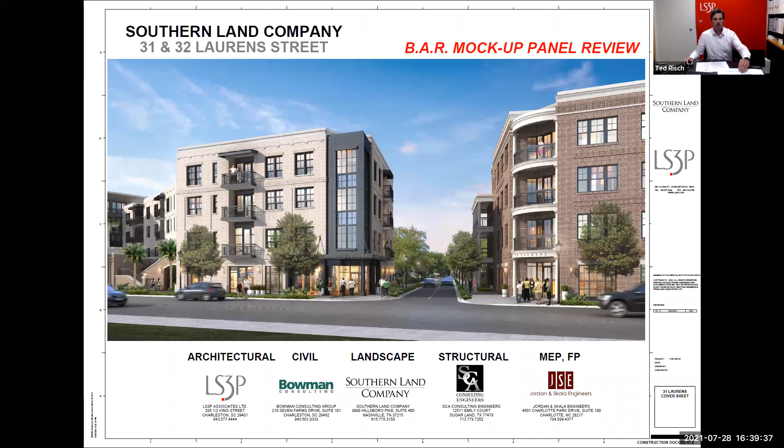There we go. So starting on the left is building A. We have our stucco wall panel on the far left of your screen, FRP cornice at the top, and carriage door with a projected box bay.

One note I had in the application was we deviated from the approved design of the concrete slab edge. Our original concept was to form that into the concrete using an edge form, and we weren't really satisfied with how that turned out. So we're proposing this alternative design, which we had previously in an earlier iteration of the project, using a pre-finished aluminum channel. We feel it's more successful and gives us the consistent look we're going for on the project.

Moving down toward the center, we have the cast stone surround that appears on building A, around this window. We abbreviated that from the original approved design as it felt a little chunky when we looked at it on the mock-up originally, so we brought that profile in. One item we noted yesterday on site was the vertical portion of the surround is actually going to have a window shoulder to sit on, to resolve a sloped mortar condition on the corner there.

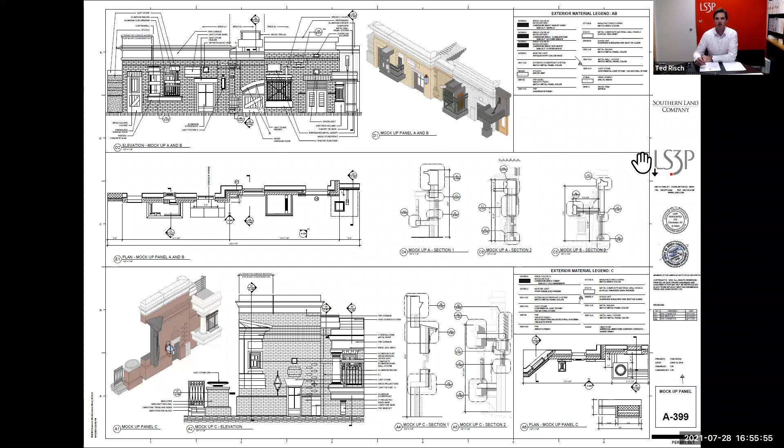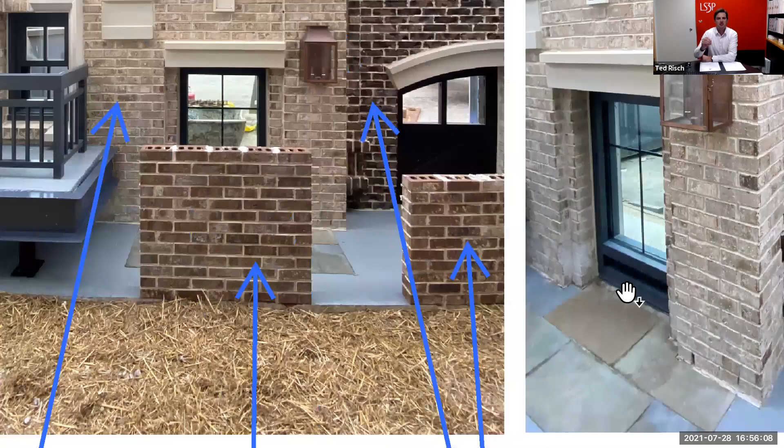That piece is a factory installed piece of the window that goes into the accessory groove, similar to the brick mold around the window. I just wanted to make that clear that it's a pretty traditional design as part of the window assembly. It's not a separate piece, so it's actually not there on the storefront, it's actually on the window. All those windows start at level 2. There might be one or two on the ground floor of building C, but you won't actually be able to see that from the street or from the right of way.

But it is in fact part of the pre-finished aluminum window assembly, and it's due to the fact that our windows are recessed so far into the wall that we needed that projected sill nose to span the gap between the window assembly and the brick sill. If we don't have that, we'll have to introduce a new material to span that gap, which will cause a little bit of discontinuity in the waterproofing, and just another element in the window assembly we don't really feel is necessary. So I just wanted to clarify that.

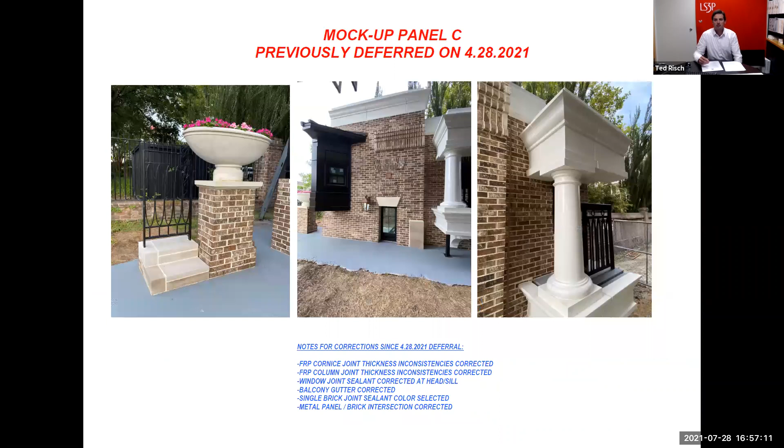And then obviously the long lead time items that we are focused on at this point for the project are brick and windows. So, thank you.

Okay, we will now move to board discussion and a vote, potentially a vote. What do my fellow board members have to say about this project?

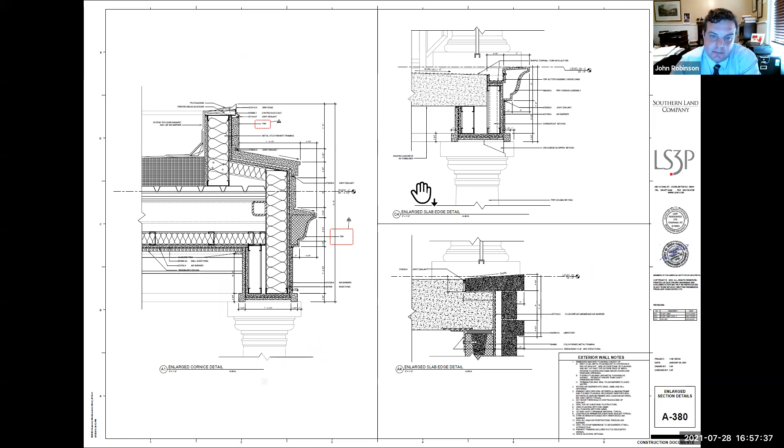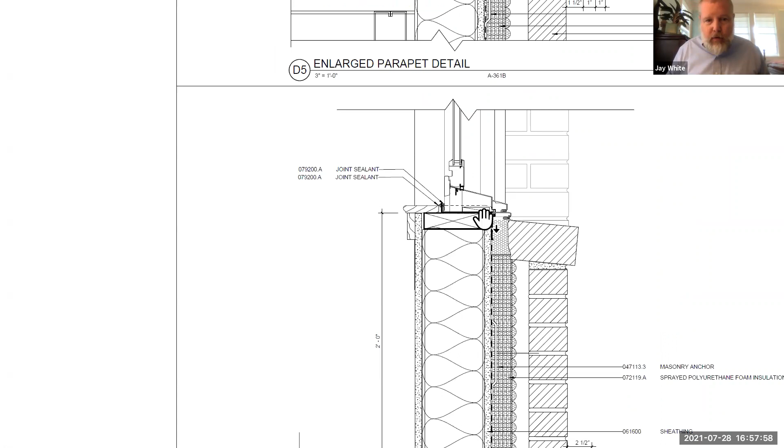I'll jump in very quickly on this. I don't really have a lot of comments. I know staff has spent a lot of time and has produced an exhaustive list, so I'll just go by method of exclusion here, the ones that I have concerns about. I actually think that those sill extensions on the windows are fine. That's a very typical thing, and I understand they're using tabbed windows here, so they're trying to close a gap, and I saw no fault with that. And then let's see what else.

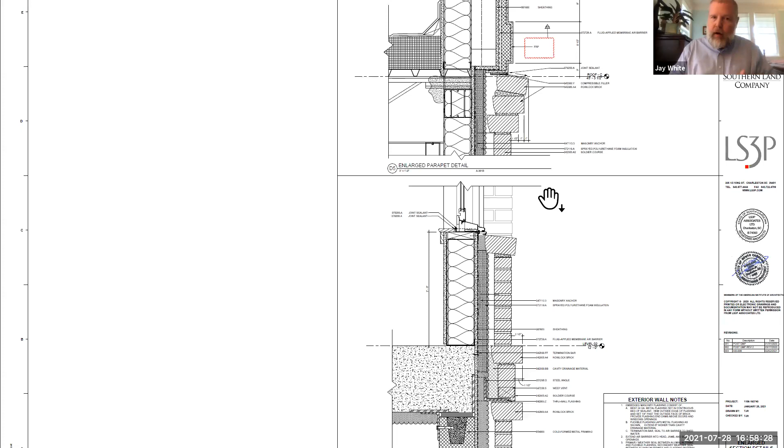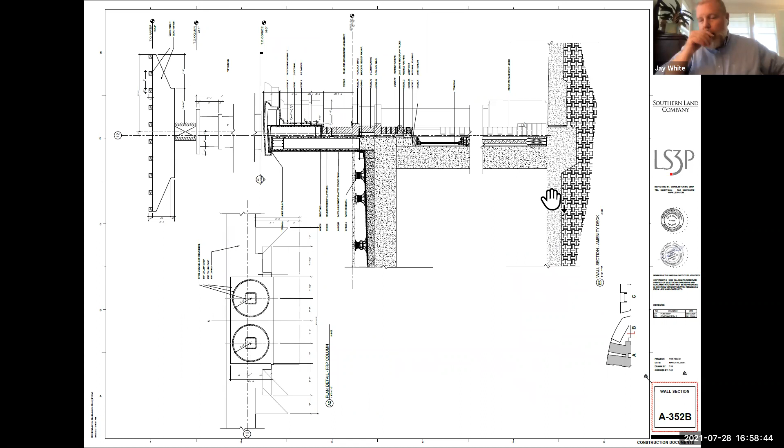The cast iron column—there was some discussion about that, and I'm going to jump between buildings here, so I'll just be frenetic. There was some discussion about making sure that the ceiling of the canopy or deck above was designed such that it reflects a beam or joist that bears upon that column. I think we all had a sense of what that meant, and I think it's just a revision to the ceiling design that would achieve that. It would be much improved, rather than just having that column sitting right above some bent, field-formed metal on the ceiling plane.

I would really caution the team to guard that precast or cast stone, because there were some dings that were repaired, and it was very obvious where that happened. Similarly, make sure the mortar joints between those units are really well tooled, because that was a little bit of a rough spot that we noticed in the field.

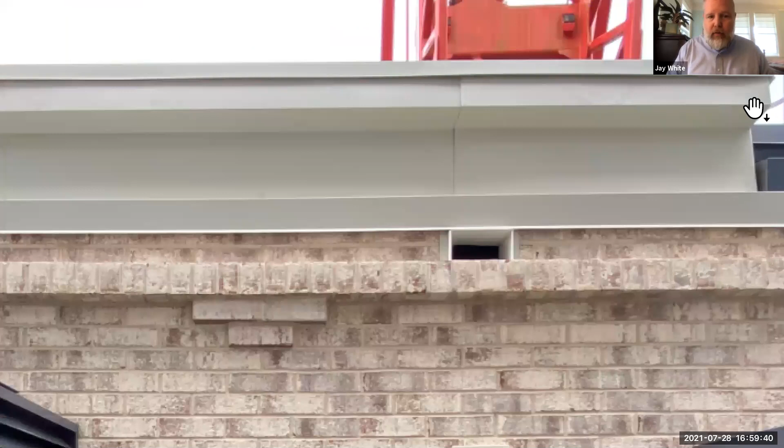A couple of things I'm a little concerned about: it seems like staff is recommending that we abandon the kick at the base of copings and other flashings. That's now what I would consider a traditional detail, to make sure you have a drip condition where you transfer from the metal to the facade material. That even shows up in 19th century or 18th century architecture, and I'm not opposed to it so long as it's clean and crisp. So I don't want to dissuade applicants from doing what is almost universally typical in architectural practice these days.

And similarly—I say similarly, and then I lose my train of thought. With through wall flashings, my studio's practice is to stop through wall flashings on brick masonry at the face of the joint.

That's debatable now, but I think if we're going to accommodate professional discretion and let people extend through wall flashings beyond the face of masonry, we really ought not to ask them to paint it, because that's a little tiny 3/8 of an inch strip of metal that occurs repeatedly throughout the facade. We're asking them to paint that and maintain that paint coating. I think it would be better if an architect, developer, or applicant wants to project their through wall flashings beyond the face of masonry, just ask them to use copper or stainless or something that will weather appropriately. Lord knows we don't want aluminum or galvanized, but asking them to paint it is not really going to work in the long term. And that's the sum of my comments.

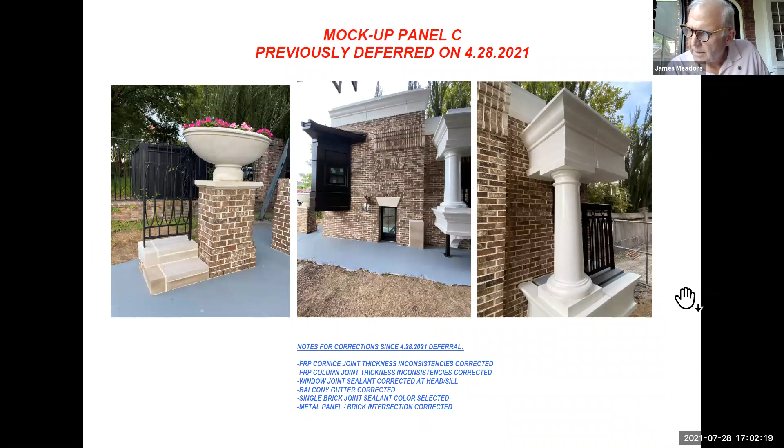As we discussed yesterday on site, the pop rivets should not be visible or exposed, even at an elevation where it's not visible from the street. Cut edges of roofing and flashing materials should not be exposed. Fasteners used for anchoring should be non-ferrous materials.

The sill on the mahogany window, I agree. I felt that it just extended a little too far. Thanks for cutting that back.

It was unclear to me, even though I got down underneath and looked at it, how the bottom of some of the balconies were going to come together, and the small outlet where water would be draining from the built-in gutters and the porches. I was unsure of where that water was going when it came out of that scupper.

I agree with Jay. The sill extensions on those windows actually come with a groove for that sill extension to be applied. And the way this wall is put together, I think that is better than adding an additional material to waterproof the window.

Also, on the strip of through wall flashing, if it is extended through the joint and then turned down, it must be a non-ferrous material. I agree that painting that probably would not be successful long term, because the edge may be cut unless it's coated after it's been bent. So some type of non-ferrous material.

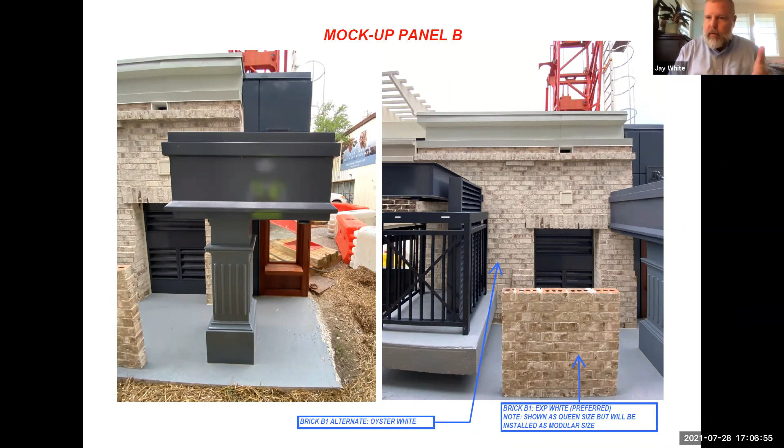Okay, further board comments or questions? One thing I forgot, and I think Leon was alluding to this: there's a condition where we have the aluminum plate on the face of the concrete, cast in place concrete balcony. We're talking about covering that gap somehow, maybe with a plate or some other thing. Also, all of that metal is so finely executed, it really looks great. However, on the underside, you see exposed welds that are not ground, and they're perfectly done, like stacked dimes as they say. But considering the fine execution of the overall piece, I think those welds should be ground as well, just so it looks monolithic. No exposed welds.

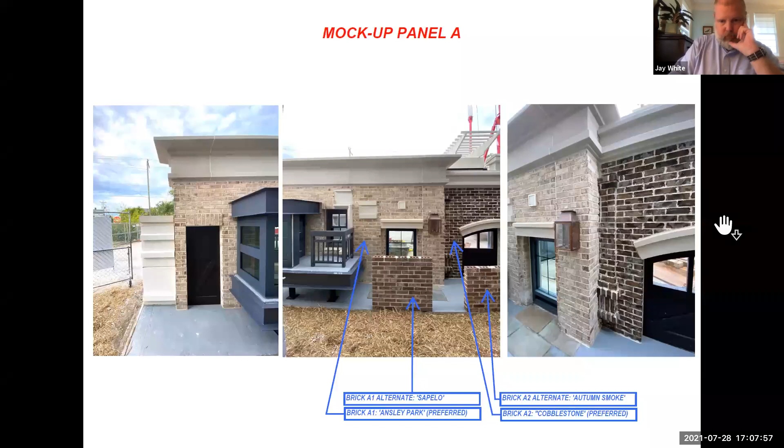So if there aren't any other board comments, I might introduce a motion with the preamble. I think this is a very well executed mock-up at this stage. The overall execution is very, very finely done, and one of the better versions we've seen. So I'd like to introduce a motion for approval of each of the mock-ups with board and staff comments.

Okay, and I second that, Mr. Chairman. Thank you. Board and staff comments. The motion is for approval of the mock-up with board and staff comments.

I'll ask this as a procedural issue to either Lawrence and or Tory. Do we need to vote on them separately, or can we vote on them as a block since we appear to be of a mind? I think since the motion is the same for all three, you can vote as a block. I did too. I just wanted to know if anyone, especially staff, had any different opinion.

So, Mr. White, your motion, as I understand it, is approval of each of the three mock-ups with board and staff comments. Have I read that correctly? That's correct. And I have a second from, was it Mr. Scott? Mr. Meadors. Mr. Meadors. All right, I'll proceed to call the roll.

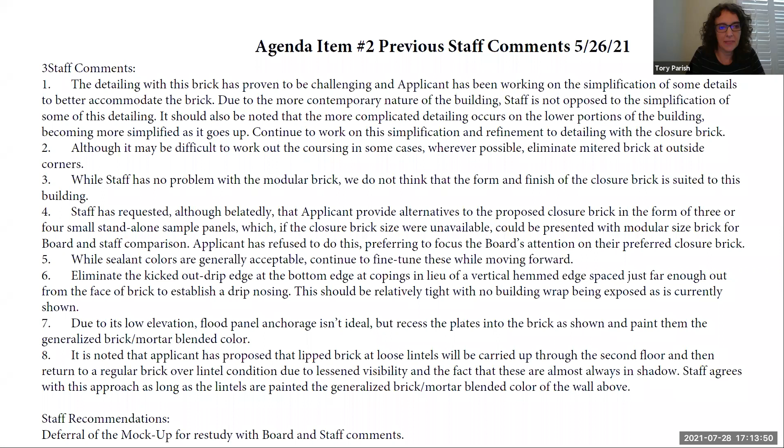Board comments from May 26 were: there are gaps at the top of mullion to lintel and bottom of mullion to metal piece. There are holes in the brick showing.

Would defer for restudy, agree with staff recommendations. Closure brick looks cartoonish, agree with staff and board comments. Agree with staff. The motion was deferral for restudy with board and staff comments.

Okay, we're going to show you some previous mock-up photographs. Whoops, we're zooming.

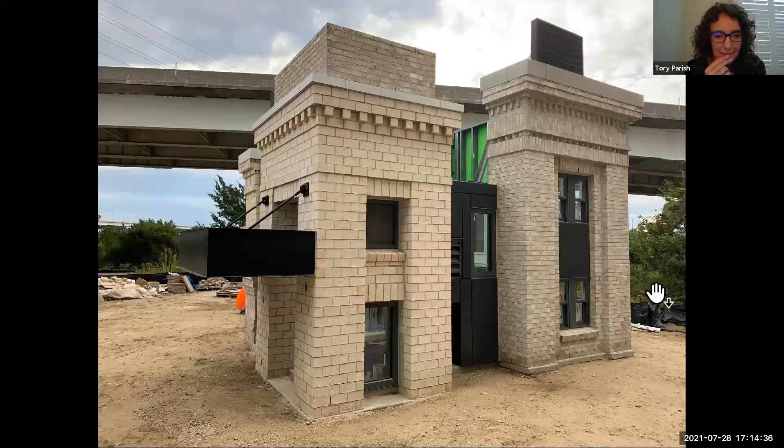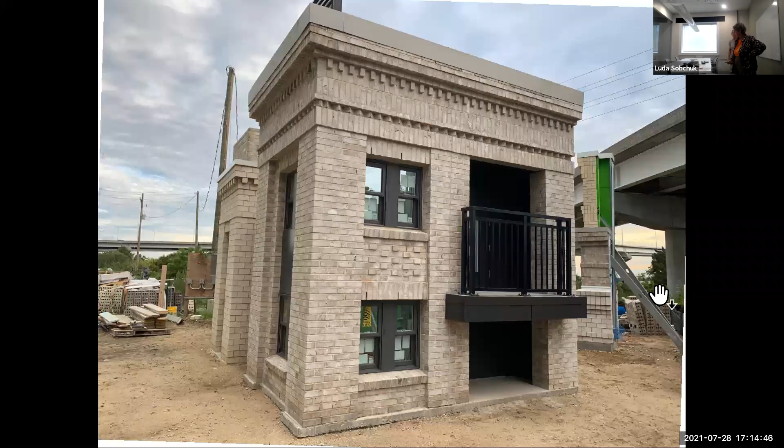And then we have some photos from the supplemental mock-up.

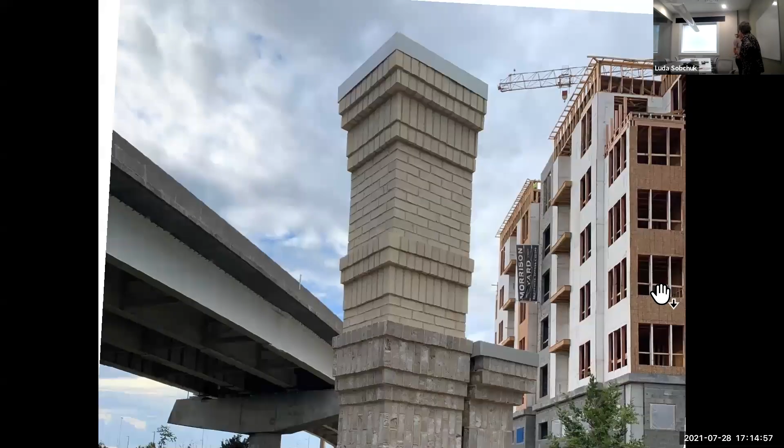We'll try. Thank you.

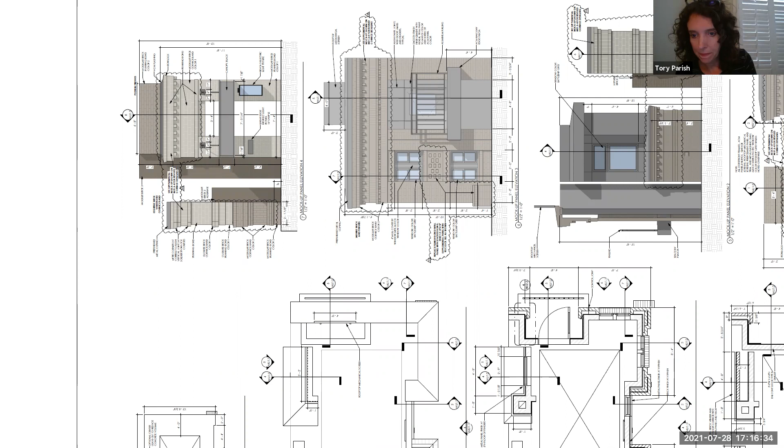I'll start us off, Mr. Chairman. Good afternoon everyone, thank you for your time. As Ms. Parish was just telling you, it was the end of May when we had our last discussion. The panel that you see on the screen right now was the first panel that we presented to you.

We've continued to work closely with staff, Ms. Parish and Mr. Courtney, to go through those comments. And I appreciate her reading through those comments again, because they've been very meaningful to us, just like it has been all the way through the entire BAR process. And we take them seriously.

And so this is where we really hatched the idea of leaving the first panel intact, so we would have it for comparison and contrast. And we developed the idea of creating a separate panel, which could be the separate second sheet. If you could go to that, please.

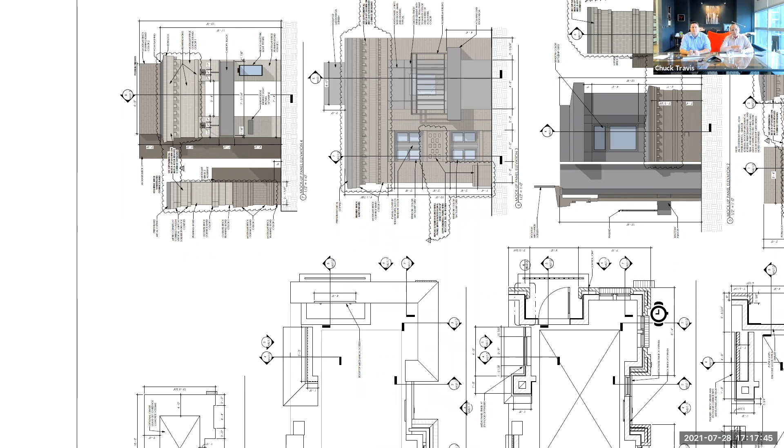And the idea behind having this second panel, we also met, we collected brick samples and actually drove to meet with Ms. Parish and Mr. Courtney in front of their office building and show various brick options to them, discuss it. We also talked about the construction of this panel and how one of the comments was to deal with simplifying the details so that it's more complementary to the more modern aesthetic of the building that we've been using all along, and we felt like the detailing is more appropriate. So we talked through all of those details.

It's been a conversation that's been ongoing, and we certainly appreciate all of their help and assistance, and obviously being very willing to work with us to get the panel that you guys visited yesterday and had the opportunity of meeting Ms. Curlin on site to discuss. We do feel like the process has been extremely helpful to us.

And what I would like to do, since you had the opportunity to meet with Maria on site yesterday, I'm going to turn it over to her. We're going to talk about the positive things that we feel came out of that conversation. We also want to address some of the things that you had concerns on that we put additional thought into, and want to give you those responses as well.

So Maria. Thank you, Chuck, very much. I apologize, my camera is not on, so I'm not sure if that's good or bad, but we'll just make it do. It's awful, it's terrible. I apologize, but you met me yesterday, so you know I'm real.

This is not a virtual person.

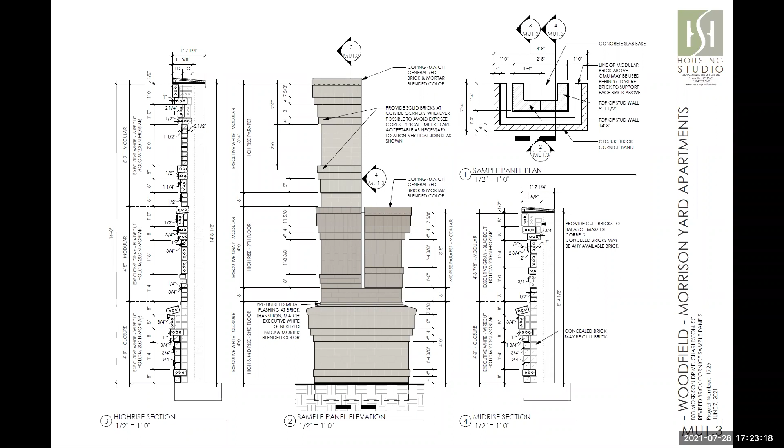Another item I really wanted to point out, which we reviewed yesterday, is that our flood panel anchorage was much better resolved now. Not only did we recess it into the brick, but we also painted the anchorage plates with a color closer to the more generalized brick mortar blended color, which is also the same color we used on painting our lintels.

Another comment was tied to our mullion coverage in between the windows, and the center mullion was revised. We're using a larger panel to actually provide better coverage and have a tighter edge that can be caulked, and it will not have any gaps as previously noted by the board members.

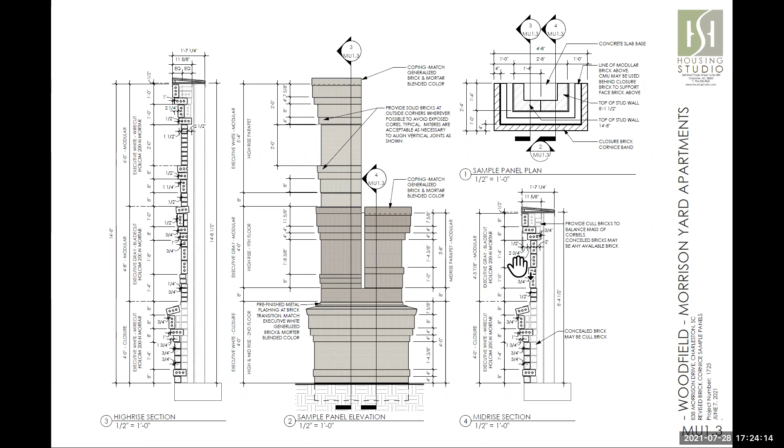I think overall, we presented a more simplified design with a different brick shape, if I can say, and size. We hope that you agree that it's a more successful design. I also want to use this opportunity to talk about some concerns that some of your team members had yesterday.

I think Mr. James had mentioned a concern about metal fasteners on our mock-up. I wanted to say that we designed the whole project with concealed fasteners to the greatest extent possible. But if there were some fasteners that by necessity had to be located at more exposed locations, like the one pointed out where the panel is under an angle under the window, where the connection was a little more visible than in any other typical location, we're going to try to have the attachments in a more inconspicuous location, and we're going to use color matching to make sure the attachments match the background so they're not visible.

I think Mr. J had a concern about the mitered corners. We did try our best to use mitered corners only where the corners are really needed and necessary, and in situations where we needed a pitch required in both directions for a horizontal surface to shed water. We were also trying to align with staff's comments asking us to align the vertical joints. Between all these different situations, we thought we did the best we could with the overall design.

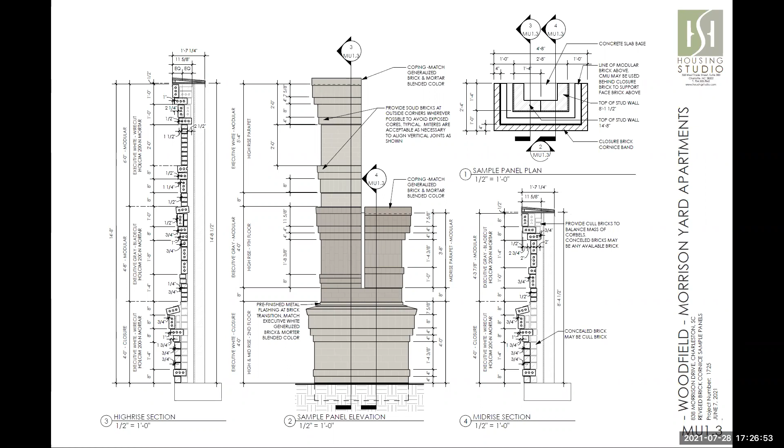Thank you, Maria. Anything else from the applicant to add? No, thank you, Maria, I think you summed it up really well. That was a very responsive summary to our conversations and issues raised yesterday.

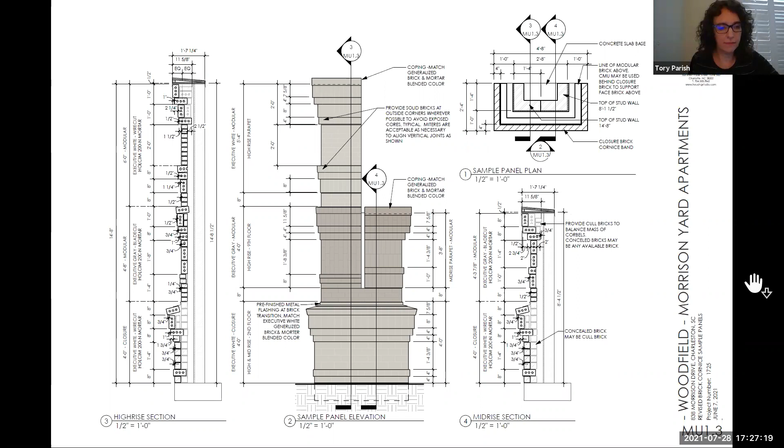Thank you. Ms. Parish, do we have any public comment on this project? Not. I did not think so. Okay, that being the case, we will move to city staff comments and recommendations.

Okay, city staff comments. Number one, see related notes on item 1 of this agenda for typical issues where applicable, and we can probably discuss those if needed. Number 2, this bears some explanation as follows.

A, staff had originally advocated against the closure brick. Applicant was very enthusiastic about closure brick, and staff subsequently agreed for applicant to show a portion for the two lower floors on the mock-up. B, initially applicant was a bit over enthusiastic and placed the same brick high on the high-rise section of the mock-up. Staff objected to this reversal of tectonics.

C, applicant was having issues with detailing and wished to simplify them. Staff advocated for the simplification, believing in part that this was anachronistic on a new contemporary style building, and simply muddled the language of the building, as well as some being too high on the building to effectively read. D, applicant has built a supplemental mock-up showing the simplified detailing, an alternative closure brick per staff's request, and colors proposed.

Number 3, staff prefers the blade cut brick, although wire cut might be used at the top of the high-rise section. The staff recommendation is approval with clear differentiation of what board and staff have approved, and staff to work with applicant on any unresolved issues. If staff and applicant cannot resolve issues, a stop work order will be placed on the project and the mock-up will be brought back before the board for resolution.

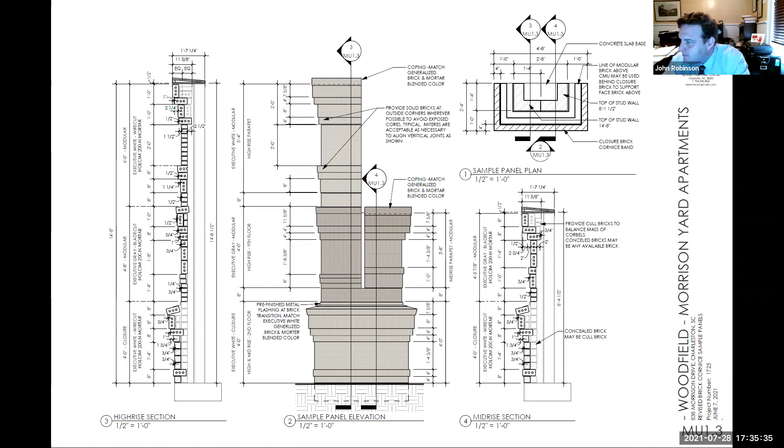Mr. Scott, how do you vote on this item? Yay in favor. Ms. Sobchak—we may have lost her to a mute again, so I'm going to scroll down to her image. Ms. Sobchak, how do you vote? Oh, that's a yay in favor. Mr. White? Yay in favor. Mr. Metters? Yay in favor. And myself, yay in favor. So the mock-up incorporating board and staff comments passes unanimously. Thank you all, thank you to the applicant. Thank you very much.

Ms. Parish, what do we have for agenda item 3 this evening? Okay, moving on to agenda item number 3. This is 578 Meeting Street. The request is for conceptual approval of a new mixed-use structure with parking, incorporating a small remnant historic structure. The project is not rated. It's in the East Side neighborhood, and the historic structure was constructed in 1929, and this is in the Historic Corridor District.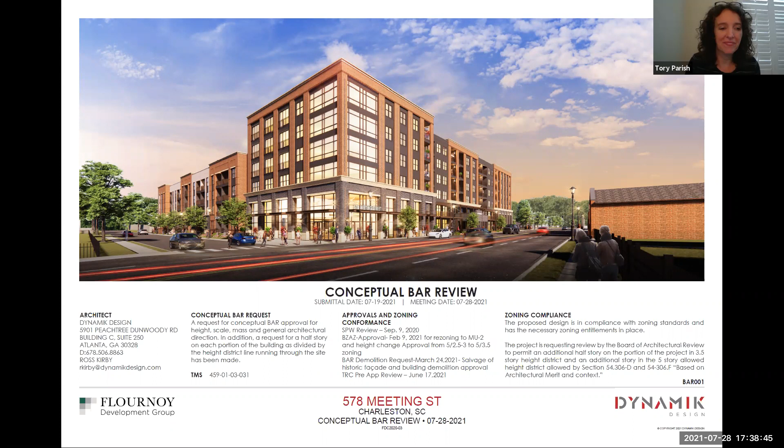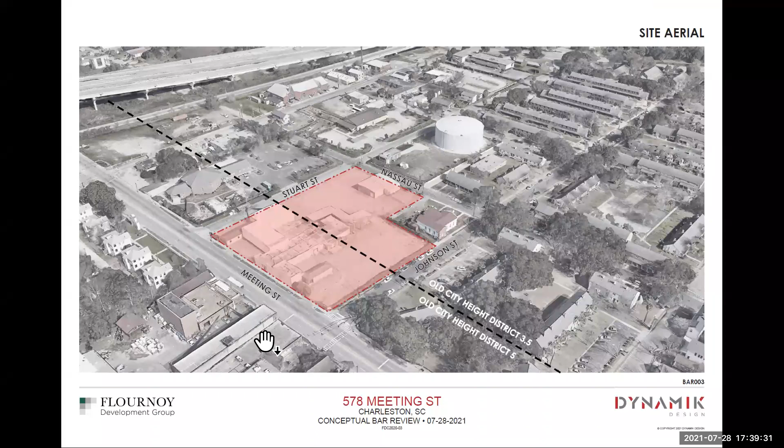There's a few items on context I want to touch on that are relevant to the project. As you said, you're all familiar with the site, you've driven by recently when we had the demolition request. Some of the key context I want to point out is that the majority of the projects in the surroundings are 2.5 story residential. There's a church directly to our southeast, the chapel there, and then one just to the north across Stuart Street. Across Nassau to the east is a very impressive water tower, water tank. And just to the west of us, across Meeting Street, is a recently completed 5.5 or 6 story multifamily project that's set back a little bit from the street and has similar retention of a partial historic structure on Meeting Street. So if you'll go to page 8, please.

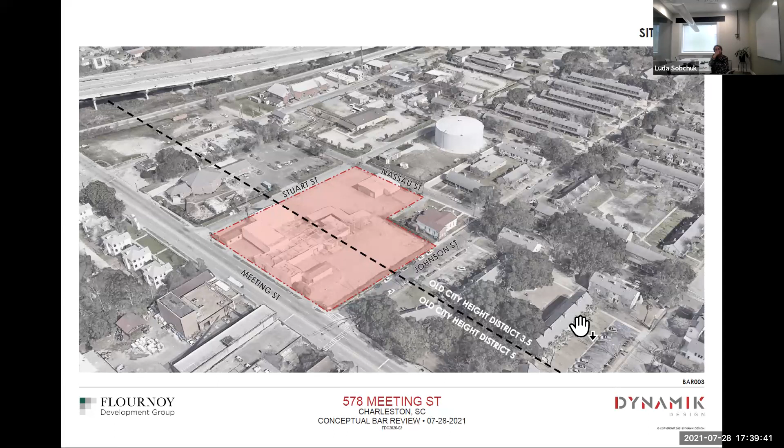We'll go past some of the historic context—these are all part of the previous demolition package. Some images here on the top left show existing context of the 2.5-story residential uses and the chapel that's on the southeast of our site, as you can see on the top right and bottom left of the page. On the bottom middle of the page, you see a portion of the existing Regis Mill industrial facility that we're maintaining a portion of.

If you'll go to page 9, please—the bottom left image, you can see closer to street level, the water tank that's to our east. We'll go back one page. I apologize for skipping around a little bit. I want to make sure we cover everything in a way that makes sense, but putting together a package that puts everything in order we can look at. So back one more page, please.

On the top left of the page, you'll see the church that's to the north of our site. On the bottom left of the page is the recently constructed multifamily project directly across Meeting Street from our site. And highlighted in that bottom middle image is the portion of the Regis Mill that we are preserving and incorporating into our project.

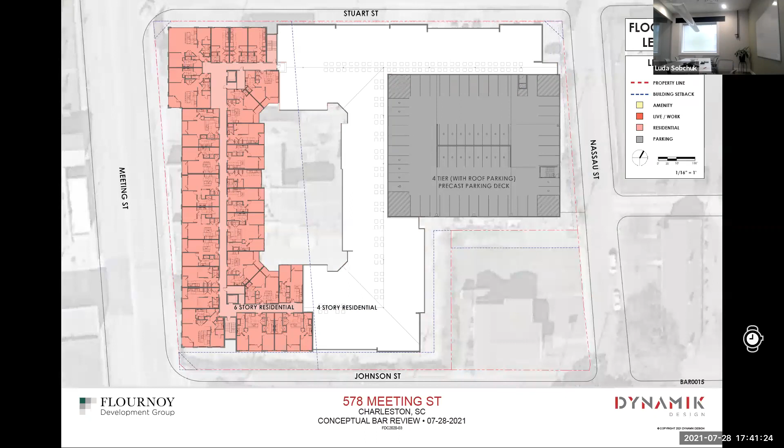So then if you'll go to page 15—one of the main goals of this project was to take what is essentially a completely paved, underutilized and unengaged industrial site and really try to convert it into an integral part of the broader community. We want to incorporate a mix of residential and some light commercial in the form of live-work units that really create an engaging public realm where right now there really isn't one.

You can see in the way we organize the building—I'm sure you've all reviewed this package before, or at least some of you are familiar with this, so I won't belabor the obvious—but we've oriented our parking deck and our services on the east side off Nassau, which faces the water tank and doesn't directly front on other residential or commercial properties.

So we felt that was an appropriate way to organize our service areas.

Along the western and southern portions of the site, we've really made an effort to pull our building back and contribute some additional space to the public realm beyond the 10-foot sidewalk that's required. It ranges in depth between 4 feet and 18 feet, in addition to the 10-foot sidewalk.

We're turning that space over and converting it into a number of different public use types. Our approach to dealing with the public realm of this project has 4 parts. We have an incorporation of light commercial live work units and amenity spaces along Meeting and Johnson Streets on the west and south sides of the site. We also have - and we're going to talk about how we're reintegrating the Regis Mill building into our design, rehabilitating and giving it a new life.

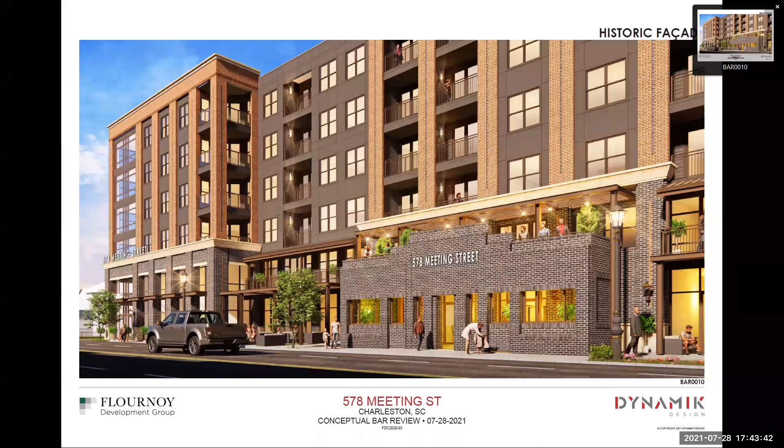The first thing I want to talk about is one of the things that's really driving how this project interacts at the street level - our integration of these live work units and amenity spaces on Meeting and Johnson Street. In this image, you can see an up-close rendering along Meeting Street of the existing Regis Mill facade in the foreground, and off to the left side of the image, the ground floor is our amenity space, our club room. What we've done is take the Meeting Street building, the portion we're maintaining, and reopen the window openings that were bricked up.

Because the existing structure behind it - the roof - is failing and not really able to be rehabilitated without being replaced, we tried to come up with an idea on how we can use this space without just gutting the facade and leaving it. So what we planned is live work units directly behind the Regis Mill facade, extending all the way up to where the building jumps out to the north there.

We create an outdoor terrace for the live portion, the residential portion, on the second floor of those units, so there's activity that's a little more secluded and private, but still happens above the existing facade. We've created trellises and canopy shading structures up there that relate to some of the other architecture on the building.

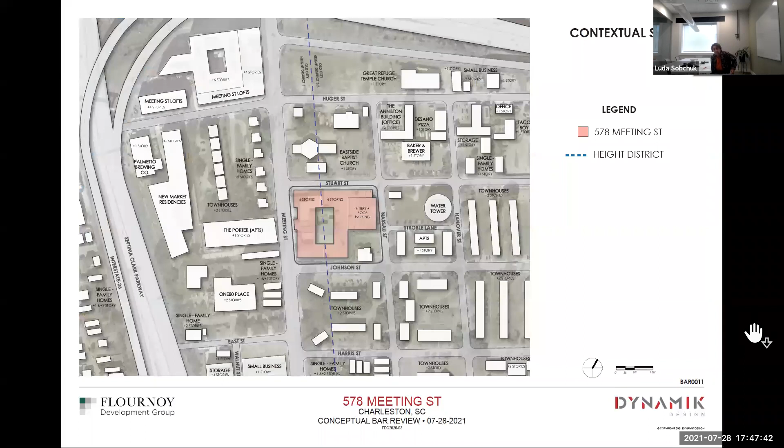Just to the north of that is the more semi-public spaces. That's where it's the deepest, about 18 feet or so, in addition to the 10-foot sidewalk. And then the size of the space tapers down just south of the Regis Mill facade.

And it's still a public space that is covered by shading elements that again serve as balconies for the living units above. Along the south side we have a little bit of a unique situation because there is an existing drainage easement that we cannot build any physical structures on, but that we can landscape and hardscape.

So we wanted to make the best use possible of that and create a lot of public outdoor space with additional landscaping and seating areas that we are going to continue to develop as we move through the project. They really present an open, almost a plaza of sorts with the width of the 10-foot sidewalk, about 25 feet in total depth along those live-work units.

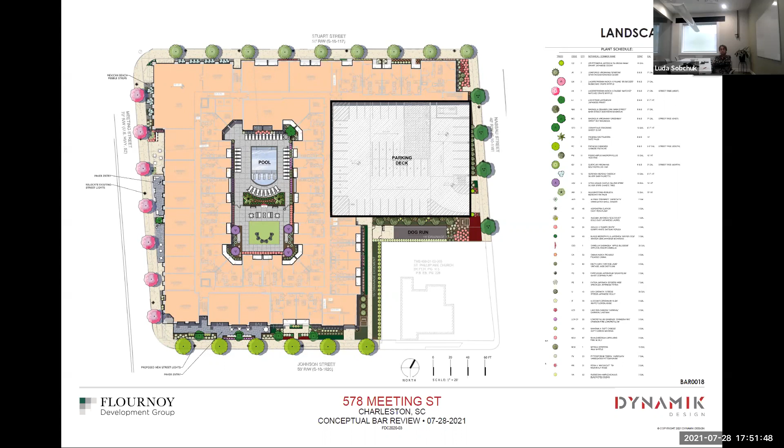And our justification for architectural merit, I want to run through a few items on. I'm sure you've looked through the bulk of our presentation, and we tried to go through and really take in the BAR's guiding principles and apply as many or all of them as we could to this building, and really try to work within those guidelines for developing the project to justify our architectural merit. So if you could please, we're going to skip a few pages ahead because I want to cover a few specific things - to page 31.

We put in diagrams and exhibits for each of the guiding principles and ways we've tried to incorporate those into the project. In this one, I want to talk about our extensive use of brick, natural stone, and glass to create what appears to be a single-story double-height base to the building, since our intent is to mitigate the appearance of this building as 6 stories. We've incorporated full-height glazing on the first 2 stories, with a cast stone trim piece above the second floor to create a base, then switched materials above to delineate the base from the 4 stories above, creating the visual appearance of a 4-story over 1 rather than a 5-over-1 building along this 6-story portion.

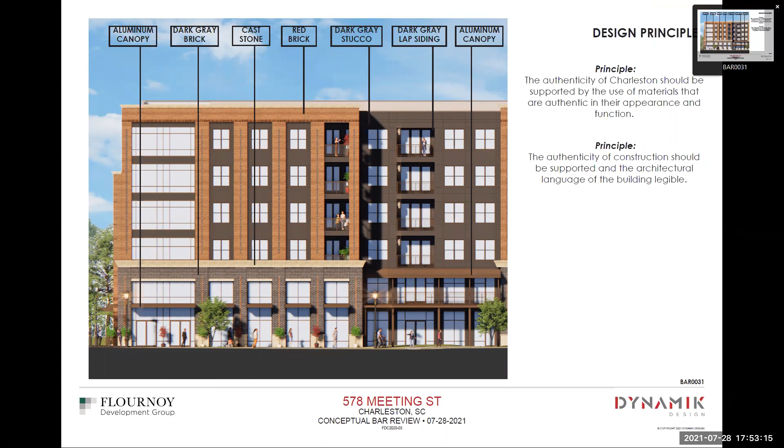What's really important to us is using authentic materials throughout, so we've stayed away from composite products and gone with natural ones—brick, stone, and stucco. The idea is we're working within that palette in prominent areas like the main corners and exterior facades, using them to break up the building massing, which, as you've noted, takes up the entire city block. It's important that it be visually distinguishable from one portion to the next and not feel like one massive block of a building.

One thing you'll note in this corner is the implementation of more vertical elements, carrying the pilasters all the way up through the top of the building—part of the design language incorporated throughout, whether in the 6-story or 4-story portion. Even elements like the glazing at this corner on the upper 4 floors may appear horizontal in isolation, but if you look at the entire composition of this corner, the way it's tied together from top to bottom creates a vertical element that draws your eye up and extends the verticality of the architecture.

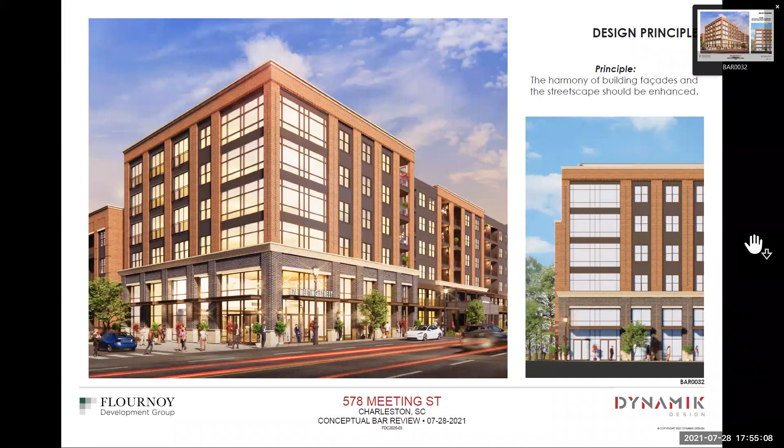You can see in this image, and on the next page, that we've made extensive use of glass on the ground floor for visual transparency. This diagram shows all the areas of the ground floor with live-work units where we've incorporated double-height, floor-to-ceiling glazing in both the ground floor commercial portion and the residential portion above. The only place without that double-height glazing is just north and south of the Regis Mill facade, bumped out on the Meeting Street side, so those areas don't compete with what's intended to be a focal point at the center of the project.

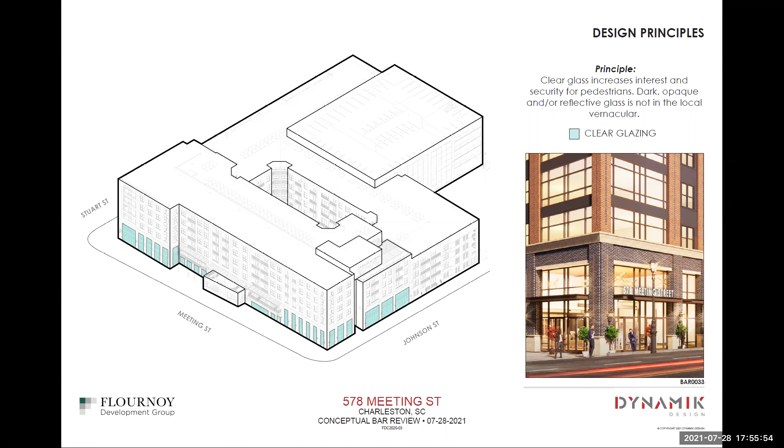As I mentioned, one key principle on south and west facing facades is the incorporation of shading elements. On the northwest corner, we have smaller canopies integrated into the storefront of the double-height club space. The double-glazed area along Meeting Street is the balcony and trellis at the level 2 elevation, and above that we have a pitched standing seam awning for additional shading and variation. At the center portion of the Regis Mill, we have another variation of the louvered open trellis used at the Sky Lounge, where we're stepping down the building to create an outdoor terrace with a full open louvered sun shading element.

On the south side, because we're restricted in what can project over our drainage easement, we've chosen to recess the ground floor storefront back into the building. This serves two purposes: it creates shading at those entrances, one of our design principles, and it creates a minor but important expansion of the public sidewalk—recesses like that draw you in visually without needing excessive signage saying 'enter here.' It naturally draws people into the places in the building where we want them to go.

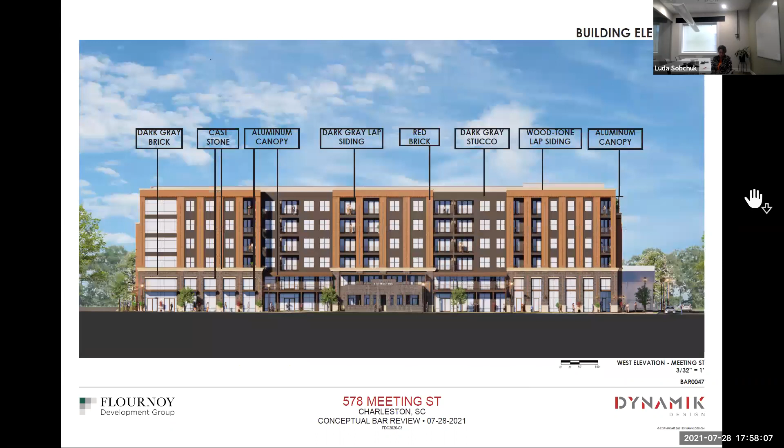I want to talk a little bit about the overall massing of the project and the rhythm we try to incorporate. As I mentioned before, carrying these vertical brick pilasters all the way up the building for such a long block face is the way we've chosen to manage incorporating not only the verticality of the design, but also the rhythm and balance of the site.

You can see that we've got a portion of the west end where we've intentionally left out a pilaster so that we can draw attention to what is going to be the main part of the project that people see as they come south along Meeting Street towards Charleston. Along the eastern side, we have a similar approach so that the overall massing is balanced. And in the center, we've kept those same type of pilasters so that we can frame the location of the Regis Mill building.

We let the portions in between those various masses fade a little bit on the upper levels, and have enhanced them at the ground two floors with the balconies and awnings. So if we'll go to the next page.

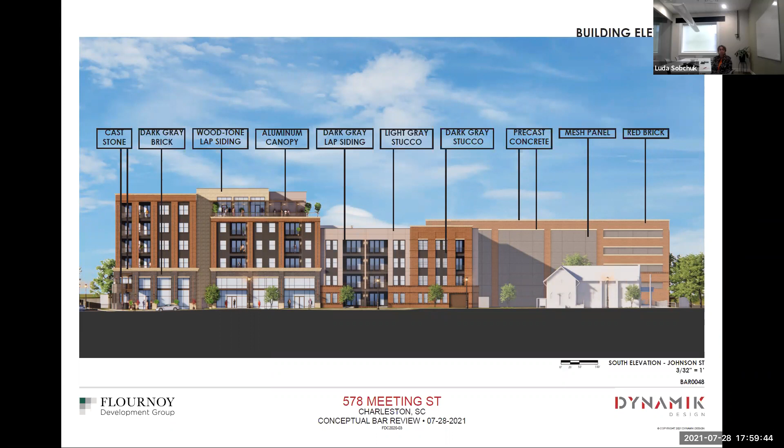You can see on the south side of the site where we have the 6-story portion on the left, we have our Sky Lounge where we're starting to step down, and then we're down to our 4-story portion. And then we have a pretty significant separation between ourselves and the chapel to our east or southeast, to respect the context of that transition and really try and mitigate what is obviously a higher density in an area with very low density. We'll go to the next page, please.

Along the east side of the site, we have the frontage of our parking deck, where you can see we've incorporated a lot of the same design language with our vertical pilasters and brick colors and materials, so that the parking deck doesn't feel like it's sticking out like a sore thumb. The design language and materials are part of the same part and parcel as the rest of the project.

The thing where this varies a little bit is that we've put in some fabric mesh screening into the open panels of the garage to mitigate any light spillage from inside. There are spandrel panels that come up to the height required to block any headlights, but the mesh screening is more to prevent people from actually seeing into the garage and seeing cars and lights, but also to prevent light from spilling out into the neighborhood. And if you'll go to the next page.

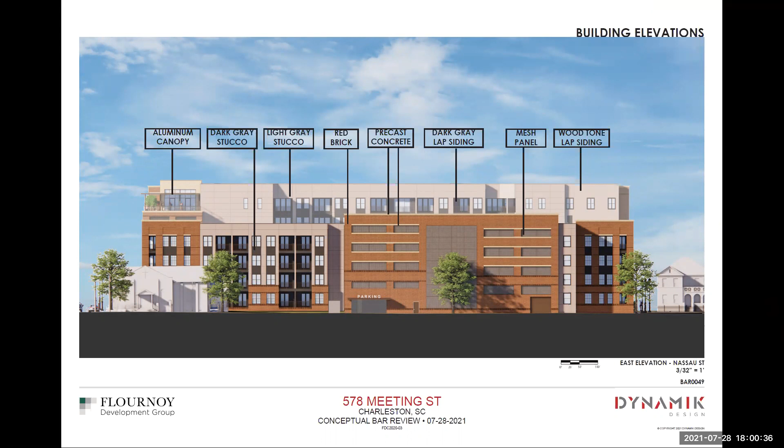Again, you can see on the right side, this is the north facade where we have our more public facing areas, our club room. As you move further west on the page, we have at the ground floor our co-working space, so there are stoops and stairs leading up to that. And then we have our leasing area where we've incorporated additional signage and canopy and stairs to really draw attention to that and bring people in without making it a focal center point of the entire project.

And then we use the same language on this side, same material, same language as on the other parts, but we've lightened up the color of the stucco so that, being a lower building, it appears less massive with the lighter color, and still complements the masonry colors and the other darker stucco color that we're using at the window infills.

While we're on this, I think it's important to point out that we've made an effort to vary not only the number and size of windows, but the type. I think we probably still have some work to do there in possibly unifying the windows into a more consistent approach so that there are fewer types than what we show now, but still an adequate variety so that it doesn't feel like there's a cookie cutter approach to the window placement.

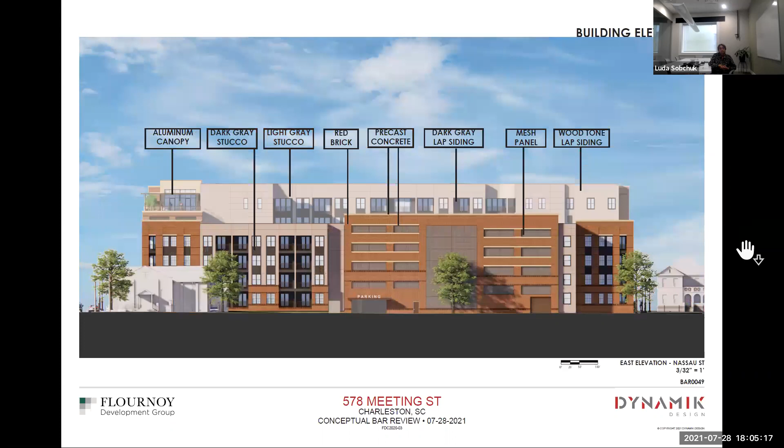We are also greatly concerned that the historic Regis Mill facade is not respectfully incorporated into the design, but is rather overwhelmed and ignored by the homogeneous building facade directly behind it. There should also be greater effort to better distinguish the historic building, to allow it to better read along the Meeting Street streetscape and help tell the story of the evolution of the site.

Finally, given the significant issues with the architecture, we do not feel the request for additional height is warranted. We particularly feel additional height on the parking garage should not be awarded. This is the portion of the building where the design and materials are weakest, and it's questionable if it exceeds the height request allowance, as there are 5 levels of parking facing Nassau Street, and it's taller than the 4-story building component directly adjacent. We strongly feel projects of this scale best benefit from engagement with the community, and we're disappointed the applicant did not reach out to collaborate with us prior to the submittal. But we always remain open to working with project teams to help guide proposals. However, due to the complete restudy needed of height, scale, mass, and architectural direction, we urge the board to deny the project as proposed. Thank you.

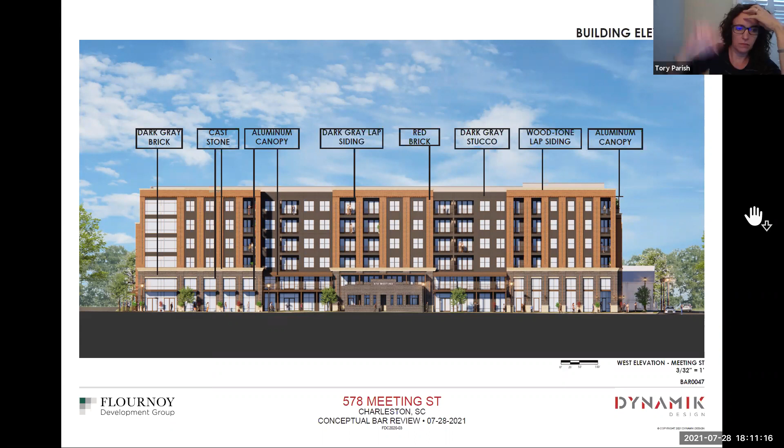Have I missed any public comments, Tory? Looks like a no, you have not, you've got them all. Great. So at this point, public commentary is concluded. And so we will move to city staff comments and recommendations.

A few staff observations on 578 Meeting Street. For section 54-306F, Heights District 5, the BAR may permit an additional story based on architectural merit and context. Number 2, as taken from the ordinance, section 54-306-17, architectural merit means a project that reflects exemplary architectural and urban design, utilizes the highest level of materials and finishes, and contributes to the public realm as outlined in the Board of Architectural Review principles.

And number 3, while this is a conceptual level review, because a finding of architectural merit and context is being pursued, there are staff comments which address the elements of architectural merit, and these might otherwise be handled at a preliminary review. And then staff comments, number 1, consider embracing the asymmetry caused by the parameters on this site.

The historic structure is not at the exact center of the buildable footprint, and the relationship of Meeting Street to this block is angled. The rhythm of 5 similarly sized alternating bays, ABABA, may be too forced or stagnant given these parameters. Consider how the mass at the northwest corner might be a stronger anchor via some play in the parapet height, for instance.

Number 2, the proposed ratio of brick to stucco on this building is minimal, with the predominant material appearing to be stucco. Expand the use of higher quality materials on the building.

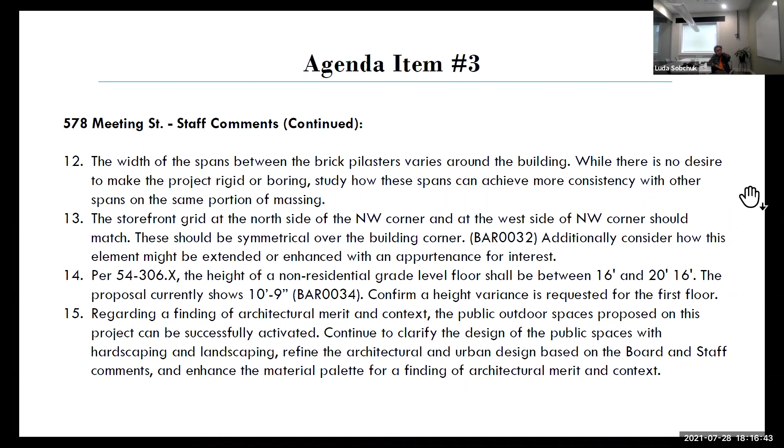The staff recommendation is deferral for continued refinements based on staff and board comments. Thank you, Ms. Parish.

The applicant now has a 5-minute period for clarification or response to the public comment and city staff comments and recommendations, if the applicant chooses to exercise it.

Yes, I do, and I'll keep it brief. I want to say that I appreciate the honest feedback that you got from the Preservation Society and the Historic Charleston Foundation, as well as the 2 neighbors who took the time to provide their input on the project. Similarly, having worked with the staff on a couple of preliminary reviews for the project, we've worked through a number of iterations on the design, incorporation of various elements, and I appreciate everything they've done to help us get to this point, and I look forward to working with them to resolve some of the things they brought up.

I do want to say that, yes, for the height variance request for the first floor, we do have 10'9" floor-to-floor at the commercial portion of the live-work units, and so we would request a variance for that. That is so that the second floor there lines up with the second floor for the residential units that are around the other portions of the project.

Okay, thank you for that clarification, Mr. Kirk.

We'll now move to board discussion and a potential vote on this agenda item. What do my fellow board members have to say about this agenda item?

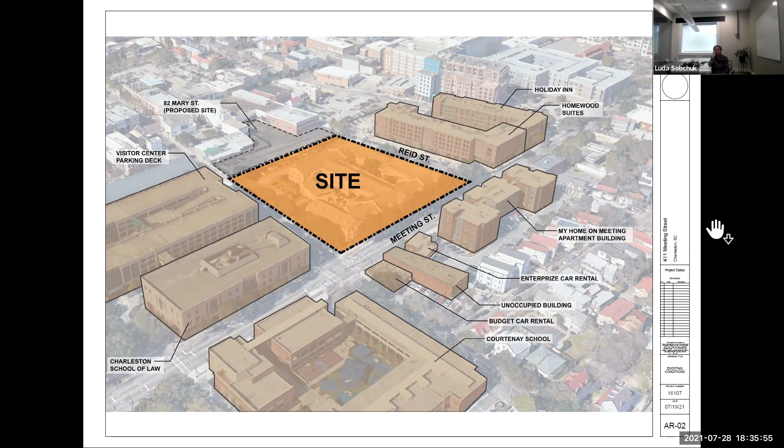If we could just go forward one slide. I put a couple slides in here to quickly revisit the advancement of the project through the conceptual approval process. You can zoom out to fit.

On the left, our original design had the apartment building along the low line. It has evolved on the right to what you see approved currently, where we brought the apartments onto Reid with a step back on Reid, and the condos likewise have a step back along Mary. The low-rise portion of our project is back along the low line. Big moves that have been incorporated.

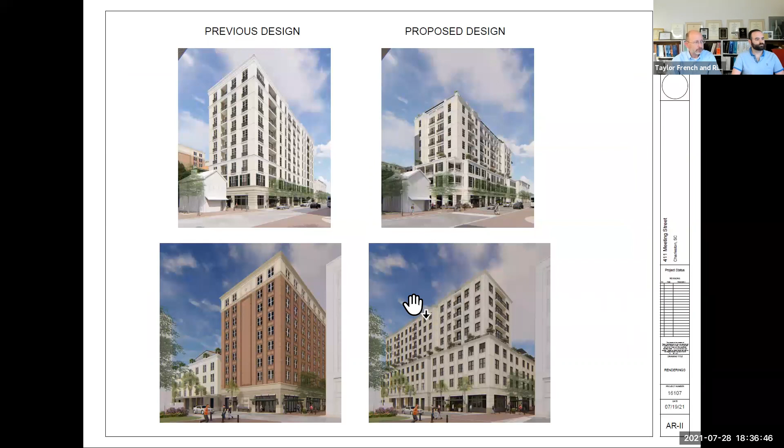If you don't mind going one more slide forward. I think these show exactly what Mike was saying. On the left two images you see the condo and apartments as originally presented. After height and mass approval, the proposed condominium is on the upper right, and the proposed apartment on the lower right. You can see the step backs imposed on Mary and on the low line—a lot of progress from previous to new, and a lot of responsiveness in the design.

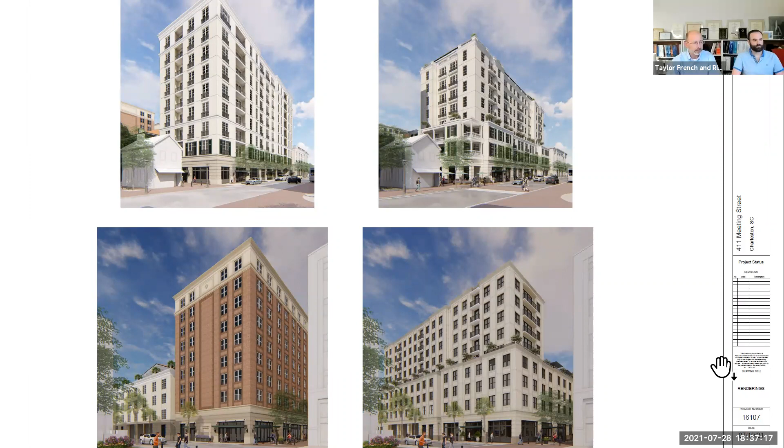If you wouldn't mind going one more slide forward, that's just revisiting where we've been. Now today we're responding to comments at the preliminary level, so we're talking about detailing, ornamentation, and the fine scale details of the project.

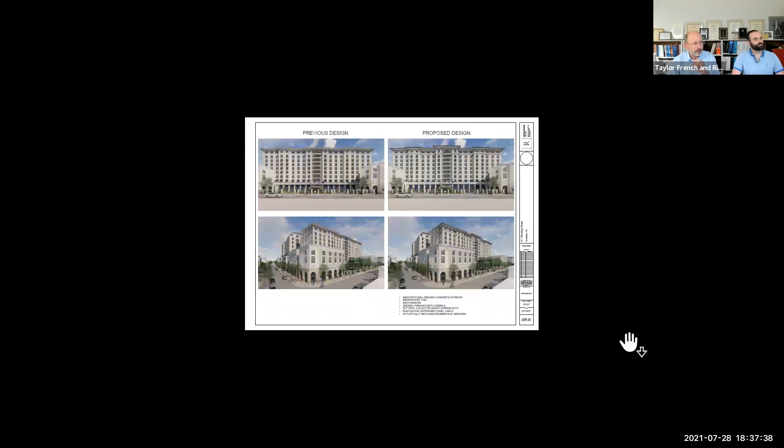As we've already stated, 3 of the comments were related to stucco. As Mike just said, a big move today is to represent this project in a different material. Architectural precast concrete is like stucco—it's an integrally colored permanent material with a relatively smooth appearance. So all of the ways we were able to render these buildings before as stucco, we'll be able to do as architectural precast.

All the flat areas would then go from stucco to precast. Some of the low relief ornamentation that we were doing before out of stucco can now be integrated into the precast forms, and the high relief detail that was going to be applied anyway in a stucco building will be applied likewise to a precast building. So we think going from stucco to precast is actually a fairly natural transition as far as the architectural detailing goes.

What you see here on the left, both images, is what we presented in April, the previous design. On the right is the current proposed design for the hotel. The other comment besides stucco was to focus on richer detailing of the hotel tower, specifically above the 3rd floor. There were a lot of positive responses and general approval from the board about the detailing of the building up to the 3rd floor, and the request was that we apply that same concern to the detailing above the 3rd floor.

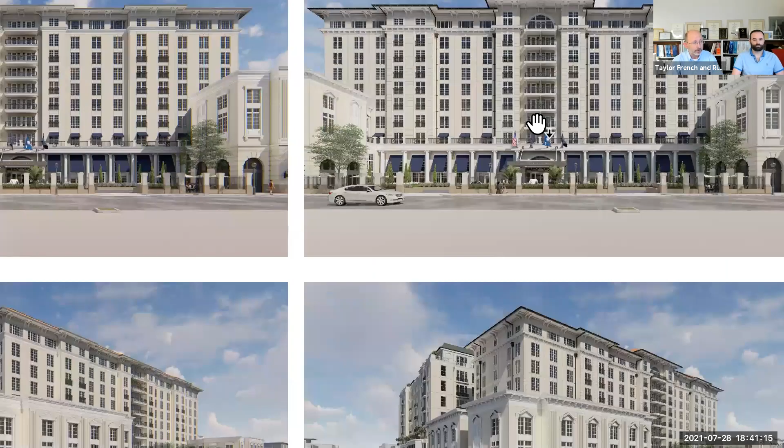One of the major moves we've done on this hotel is put a pitched roof on it. This is something that is a natural and required part of having a pitched roof, is how do we handle stormwater? We think that by addressing that architecturally and doing a good job of it, that adds a richer level of detailing to the hotel that is both functional and aesthetic.

So if you wouldn't mind zooming out just a little bit so I can refer to the list of moves that's down at the bottom of that slide.

Another item we've done is to add rustication. This is something that in stucco is hard to do, but in precast, very easy to do, to give some additional richness of detailing and depth of facade, adding rustication to the three vertical columns of rooms that project from the hotel tower. We're going to see more of that in the next slide where we zoom in.

And then the last thing we did was to change the shape of the pediments that occur over the windows on the 3-story portions of the hotel.

If you wouldn't mind just advancing one more slide, I think some of these details really are better presented on this slide. So revisiting those, there's the breaking up of the roof line on the hotel. You'll see that in the upper right, the center portion that gets popped out.

The center portion, and then on the lower right, it really is shown there where we're lifting up that roof a few feet to break up the roof line. The arched window, which I think you noticed before, is shown very clearly here in the lower right image.

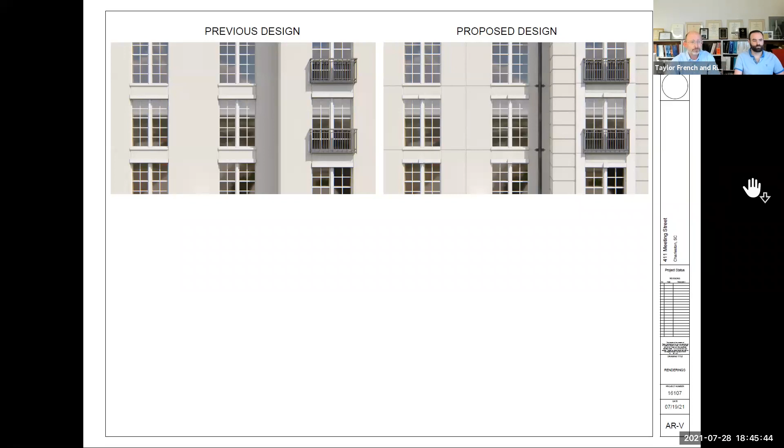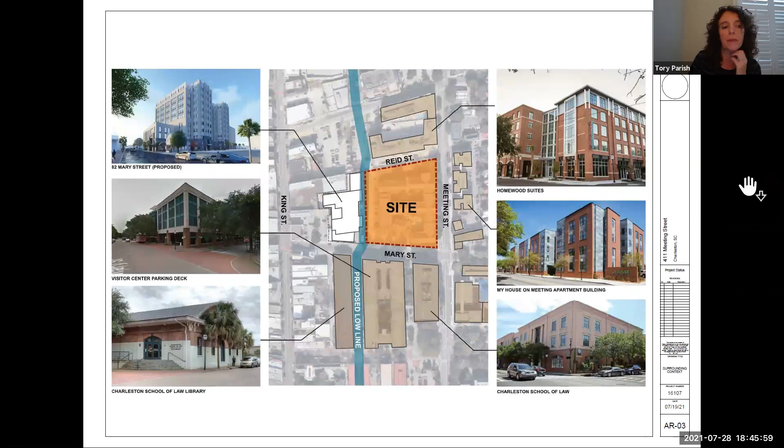Thank you, all three of you, for that thorough presentation. Ms. Parish, do we have any public comment on this agenda item? Yes, we do. We have Ms. Minigan and Mr. Schwebler, both promoted to panelists. I guess we can start with Ms. Minigan, go in alphabetical order if she's available.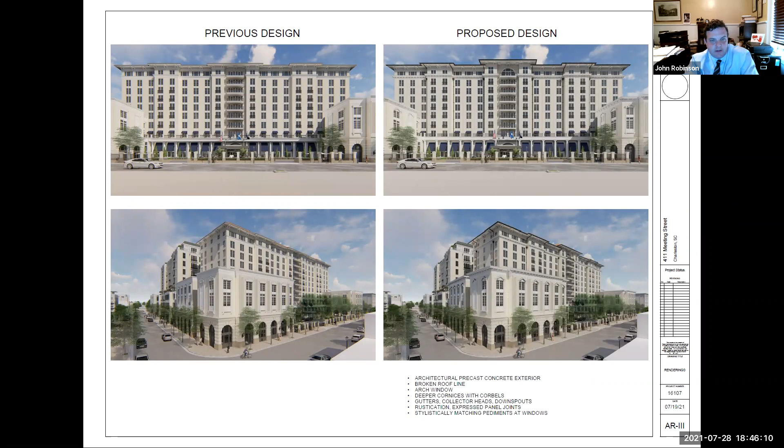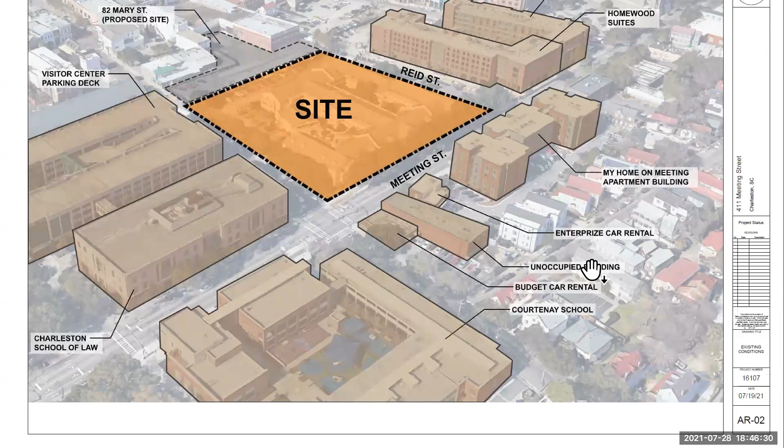I am, thank you. Erin Minigan with the Preservation Society of Charleston. The Preservation Society would like to thank the applicant for reaching out and working with us throughout the design review process. We are generally comfortable with how the proposal has progressed and find many of the adjustments made from the previous version very positive, including the increased depth of the roof form and cornice on the hotel, the incorporation of the arched window on the 8th floor, and the change from stucco to precast panel.

We previously made a comment in line with staff, encouraging setting the windows deeper into the wall, and we're concerned to see the windows were still set rather shallow. However, in speaking with the applicant, we understand it will be possible to recess the windows a few more inches in the next round of drawings, and we would recommend the board incorporate that condition in their approval.

Thank you, Ms. Minigan. Mr. Schwebler. Yes, this is Justin Schwebler with Historic Charleston Foundation.

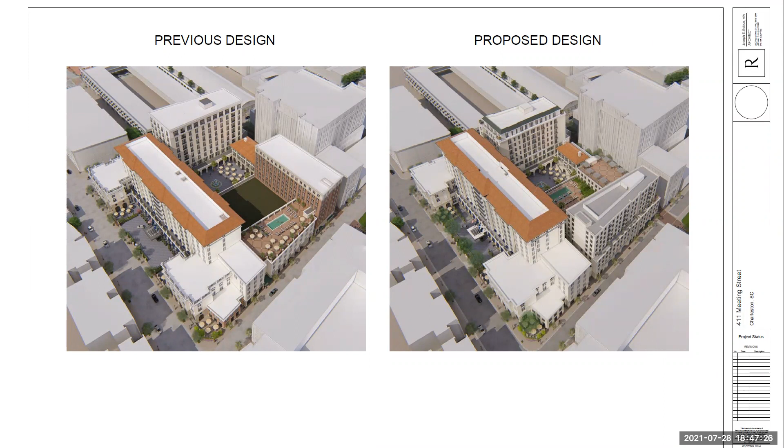We'd first like to thank the applicants for their dedication to incorporating the Lowline into their master plan and sacrificing the square footage along that property boundary to make a unique place for the public to enjoy. We find that this portion of the development is the most pleasing architecturally and will be one of the leading features of the Lowline path through the city.

We're pleased to see the improvements to the central tower of the main hotel building. The cast stone cladding and rustication have helped to give more character to a main feature of the primary elevation, and the raised roof line at this tower is also an improvement.

Our primary areas of concern are once again with the window depths on the main hotel building. Even with the cast stone application, they still seem very flat. We would prefer to see the windows recessed or an applied cast stone trim applied between the lintel and sill to help add visual depth.

We're also concerned with the use of gutters, collector heads, and downspouts. They're not commonly used on buildings of this scale, and the use of contrasting color brings too much attention to them. They should not be highlighted as an architectural feature. If these changes are incorporated into the design, we would happily recommend preliminary approval.

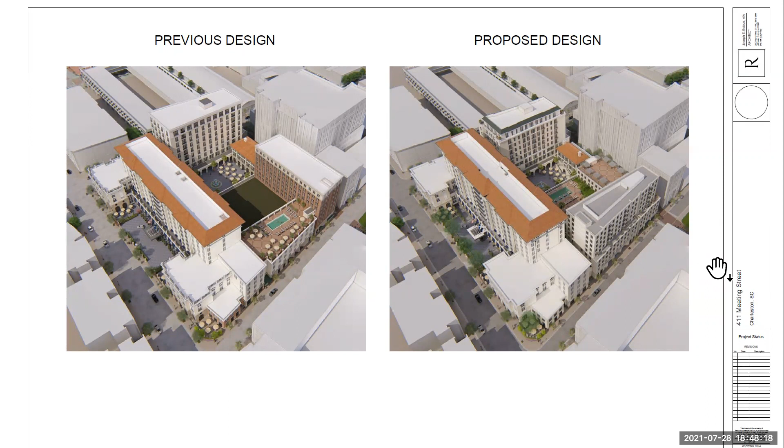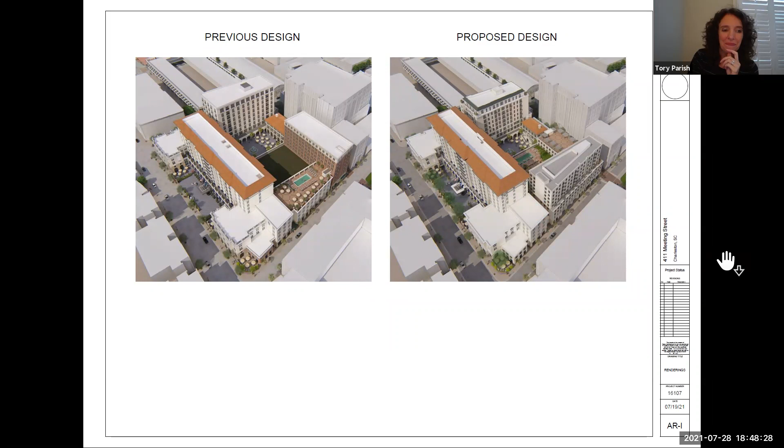Thank you, Mr. Schwebler. I'm not seeing any others on my list from Lawrence, but was there any additional public comment? And Tory saying no, there's no more. Thank you. That means we'll move to city staff comments and recommendations, if Ms. Parish is ready after this marathon afternoon. I'm ready, let's do it.

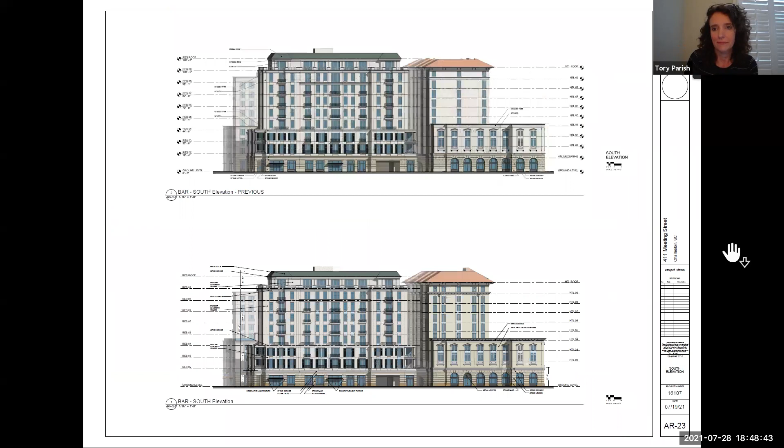These meetings used to go to 11 p.m. So our experiences are relative, Mr. White. Everyone's is to everyone else's. I understand. It's a large packet of drawings to scroll through.

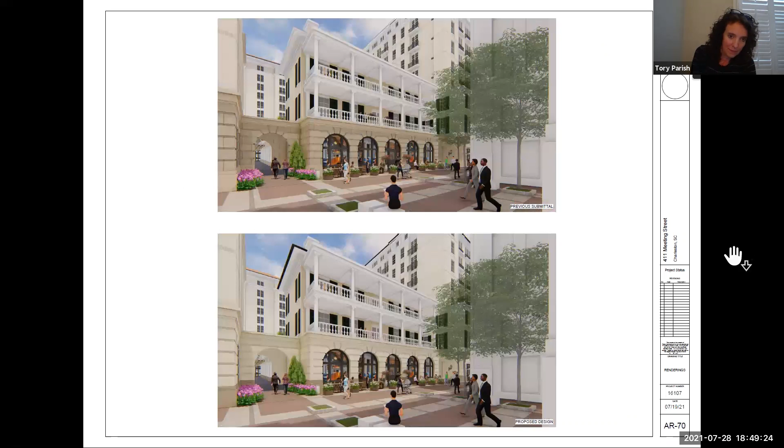Okay, we have arrived. Let's start with some staff observations. Number one, although largely maintaining and in some ways improving its elegant form, the cladding of the hotel portion of this project has been significantly altered from what was specifically requested, brick, to a prefabricated precast multi-part system shown as Gate Light on 3 of the 4 primary buildings. This product is proposed for the hotel, condo building, and boutique hotel building. The apartment building appears to use a more conventional brick rain screen cavity wall system. Any board motion will need to specifically address the use of this precast material, concrete roof tiles at the hotel, and the use of any gas lanterns.

And number 2, while unfamiliar to staff and apparently fairly new to the marketplace, a quick web search indicates that this precast system is a lightweight, resilient facade system that's disrupting the industry. The featured project in this presentation is, interestingly, a 14-story hotel on which Gate collaborated to match surrounding historic masonry warehouse-style architecture in New Orleans. This particular system appears to incorporate thin brick on a 2-inch precast concrete layer, outboard of many components, including a plane of unbroken rigid insulation, a typical storefront window system, and fire stopping on a structural steel framework.

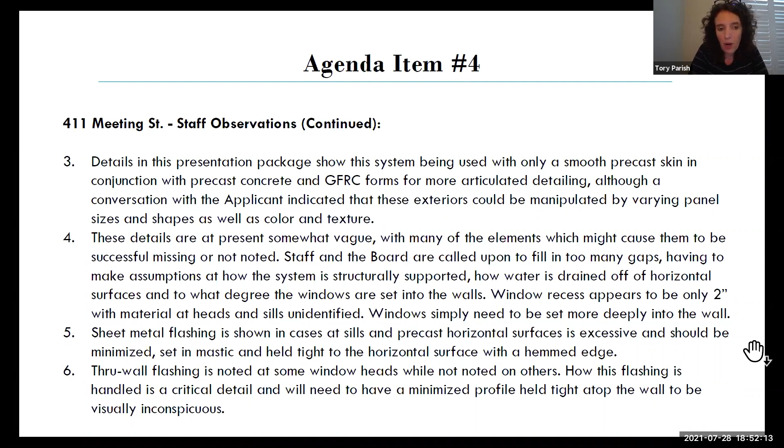Number 7, the project's height, scale, and mass are essentially the same as previously shown, with underground parking continuing to be a big positive, as are the large plaza area and the project's addressing of the low line. However, the general architectural direction is contrary to what was requested by board and staff.

Ideally, the architectural expression of the 4 visually separate structures should be distinctive, further serving to help break up this large project into smaller pieces.

Number 8, the roofing material at the boutique hotel was noted to be a hand-crimped standing seam roof. Number 9, a board comment was to increase the depth and richness in the facades. While this has been done in some cases, in others it is still lacking.

And now our staff comments.

Number 1, the use of this system is a departure from more traditional building methods, or even the 8-inch thin brick clad precast concrete panel systems used on the Jasper, and is being used on the large 40 Line Street project. While this proposed system may hold some promise, there is not enough information on the details to explain how the system components may or may not work together to complete an assembly, giving the desired results.

Provide further clarification. Number 2, although the essence of what is shown on detail 1 AR57 may be parsed out, the detail lacks enough information and graphics in terms of varying line weights to make staff unsure of its success as depicted. Provide further clarification.

Number 3, although the detailing and materials on the brick veneer apartment building are more familiar, the avoidance of a lipped brick and the shallowness of how the windows are set into the walls are cause for concern even here.